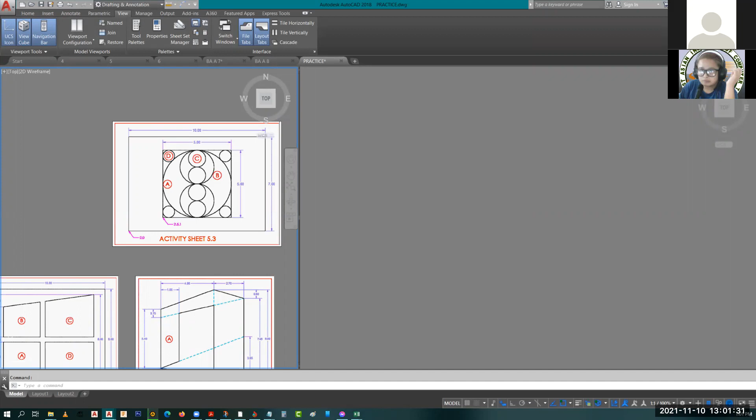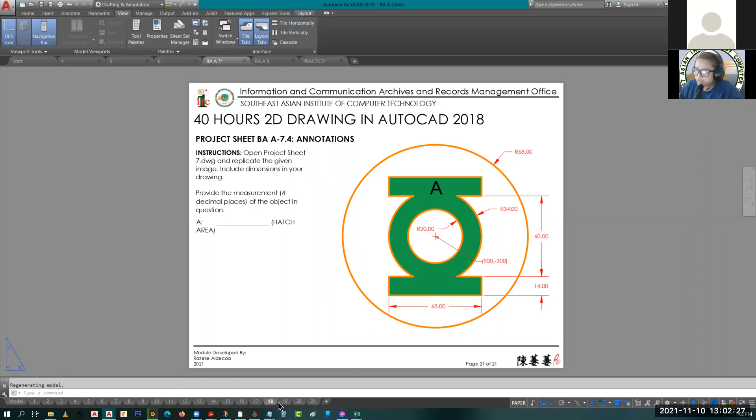Dun sa 7, ang binigay kong files isa-isa dun sa activity. Isang file, isang activity, isang job sheet. Pero yung sa project sheet, 4 yung gagawin ninyo, pero ilalagay nyo siya sa isang file lang. Open project sheet 7.dwg. Ibig sabihin, gagawin nyo siya sa isang file lang.

Hindi, 5 yan eh. Hindi ko pinalitan ng number. So 5 objects under sa project sheet 7.dwg.

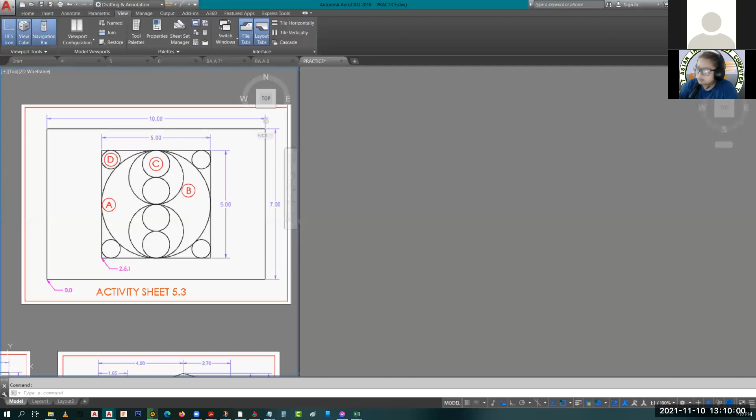Okay, review muna. For this one, this is the activity sheet 5.3, this is under the draw command. This is easy for yung mga rectangle part lang, but for the circles, hindi ko binigay yung radius or diameter, whatnot. However, apparent naman siya, kung i-analyze po natin ang object, pwede siyang makikita nyo, given naman siya. Pero kung ayaw nyo nang mag-compute or mag-analyze, you can. So here, I'm going to start na natin.

So yan o, ang isang napansin kong error, nalilimutan nyo yung mga border. Yan, ang ginagawa ito lang. Or dun sa other sheets na binigay ko, nalimutan ilagay yung border. And that's still important kasi nakalagay siya dyan, hindi yung red had, the black lines.

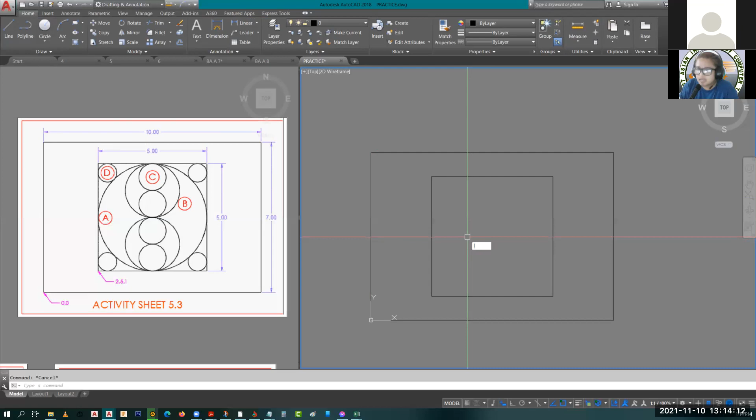So to this one, just use the line command. Then use the midpoint with the circle command - circle, then to specify the center point, get the midpoint of the inclined line. That's your center. Then once you click the center or the midpoint as your center, go to the midpoint at the top, or you can use this one, or that one, or this one. So without typing the value, you just have to select the midpoint, then click on the midpoint here.

So when you finish the command and select the circle you just created, you can see that the radius is 2.5, and that's correct because you're at the midpoint or middle part of the square, you just push it out to here. So the distance is 2.5. Then you'll also see in your quick properties that the diameter is 5. So that's correct.

So that's one strategy. I'll erase this.

Another one is tan-tan-tan. So to avoid making an inclined line, you can use this - you have to get this as your tangent, tangent there, tangent there, and also here. Let's click on our circle we just made, same thing - we ended up making the same circle. Not exactly the same, it's another circle, but with the same properties: radius is 2.5, diameter is 5. So that's it if you don't want to make an inclined line.

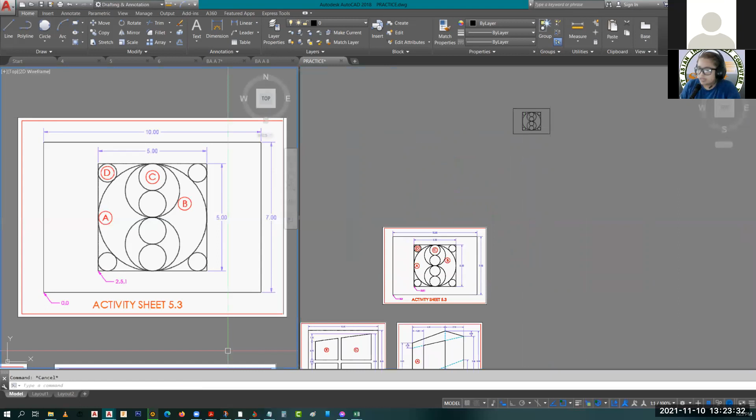Next, activity sheet 6.1. So, again here, ang laging nalilimutan is the border. Or medyo kulang yung border. Huwag niyong kalimutan kasi may dimension naman siya. Okay, so ibig sabihin, kasama siya dun sa object ninyo, or sa final output.

So next, again we're going to create the border, so rectangle ulit siya. So starting point is 0,0. Then the dimension of this square is 10, rectangle, 10 by 9. So yan, click here. Okay, so that's your border.

Now, for this part, the window part in this logo, you can use different strategies. Pero pwede mong hiwa-hiwalayin yung length, or pwede mong i-join together na lang. Well, again, depende sa'yo. So ang ipapakita ko, one of my strategies in creating this object.

So, okay, L, then the starting point is 1, 1.6. I think, tama ba? O 1. Tama, so L. 1, 1.6.

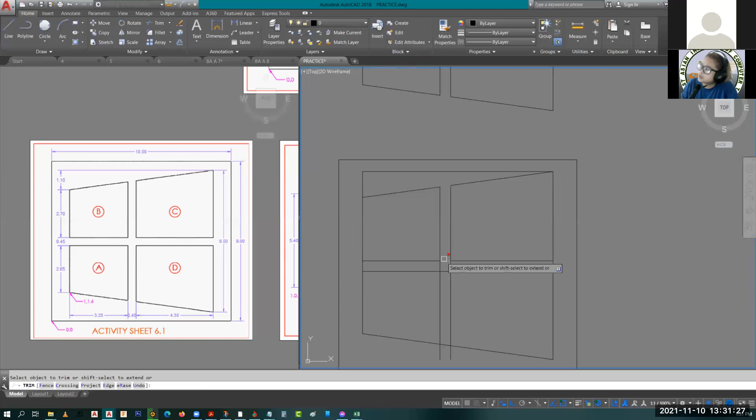Ito hindi mo na siya matitrim because this is a separate entity or a separate component. Wala naman siyang border or, sabi ko nga, boundary to trim. So dito lang tayo. This one you can trim also. So yan. For the other parts, you can select then delete. Yan. So ito pa.

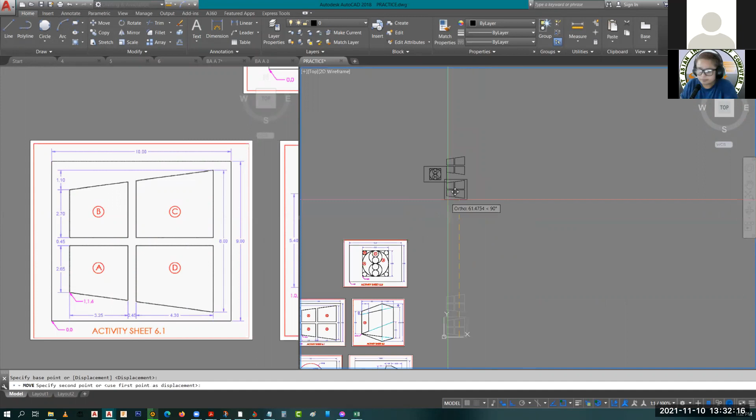So this one, this is much less time to do than dun sa unang strategy ko kanina. So again, depende sa inyo kung paano nyo siya i-strategize. So yan, that's for 6.1. Again, I'll move this somewhere up here para hindi makagambala. Kasi pare-pareho naman siya magsa-start dun sa origin. So, i-move ko lang.

Okay. So, this one, activity sheet 6.2. Again, ay, ito walang border. So, okay lang. Okay. Strategy.

Ay! Ito ba yung binigay ko? Sandali. Parang kulang ako dito. Ito ba yung nasa PDF nyo? Yes po. Wala yung dito? I think ang binigay ko meron eh. Sandali. Ibang folder kasi yung kinuhanan ko. Sandali. Ha? Wait.

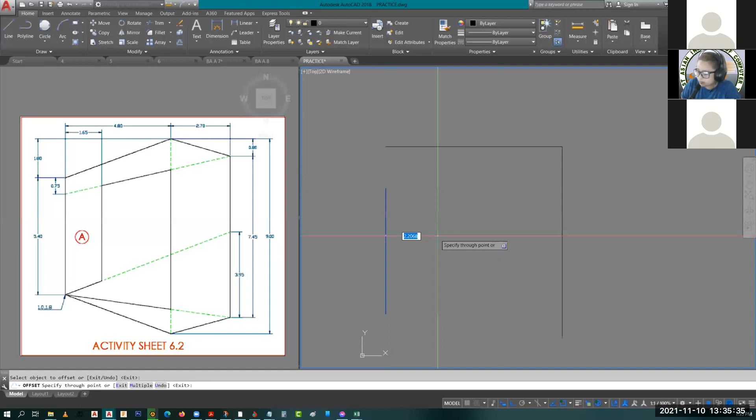Then, I'll offset this one, ito, at saka ito to their designated location. So, offset, I'm going to use through kasi magkaiba naman yung distance niya. Through. Select this. That's 1.65. This one, this is 2.7. So, this is okay.

Ang mangyayari na lang, ay actually, dapat hindi pala, no? Hindi ko na i-offset. I'll use line dito sa endpoint na to, tsaka pag na 9 na ako pababa. 9. So, para mas madaling mag-connect because we're going to connect this here. Tapos, another one at this point. Okay.

We can create this one na already. Yan na yan. Ang problema is this. So, here, pwede naman, from this point, create another line 3.95. Then, connect mo dun sa endpoint na yon. So, another one, this one. Pababa, 0.75. Connect mo dun sa, I think, dulo. Dito. Yan. So, mapapansin nyo, because I turned off the ortho, medyo naggaganyan siya.

So, sabi ko nga, depende sa paggamit. When you are creating inclined line, turn off na natin yung ortho. Yan. So, this one should be connected to this. So, dito yan. Ching. Then, let's connect this to this and here.

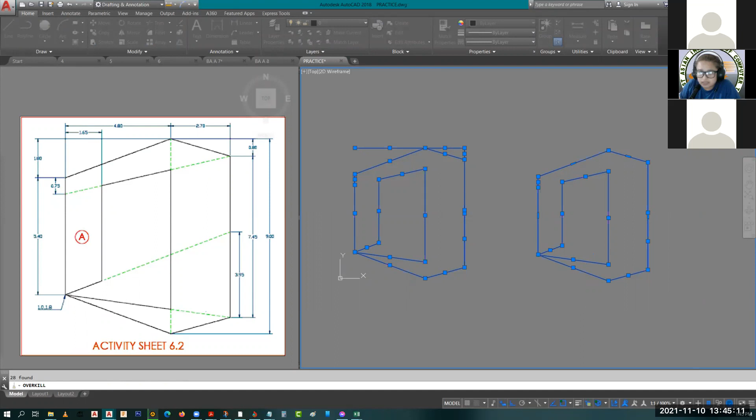Nasa na? Sandali, yung ating dialog box ay nasa kabila. Okay, so this one, ito dapat yung dialog box niya. So here, accept the default, then click OK. So sa ating command line, makikita nyo 9 overlapping objects or segments deleted.

So if you remember, dito sa part na to, kanina nung tig-click ko, there are 3 components existing. So now, ang natira na lang si polyline. So yan, hindi naman siya duplicate or hindi naman siya i-delete ni overkill kasi isang linya naman siya, wala naman siyang overlapping something.

So yan, okay, to get the area for this one, nagkakaroon ng confusion kasi actually you can, nasa na yung ating, you can perform hatch talaga. Kasi nakita niya, na-detect niya yung enclosed space. Pero, to get the area, hindi lalabas.

Sa ating quick properties or maski sa, nasa na yung tinype ko, LI, sa list, kasi, hindi siya lalabas dyan. It's because dun sa pag-hatch mo, may isang point doon na dinaanan twice. This point.

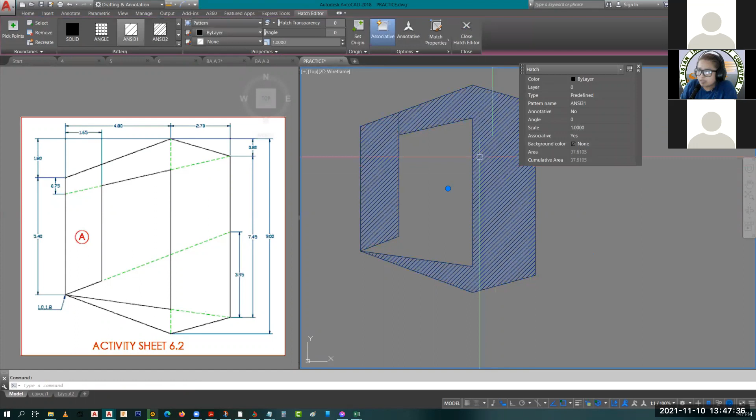Lalabas yung inyong value ng area. Kasi ang kinuha niya muna is this part, loop lang niya, kaysa sa isang isahan na nagkaroon ng problema dahil may isang point na twice na-detect, kaya hindi niya na-calculate yung area. Para ma-remedyo, pwede kang mag-trim dun sa hindi kasali sa object. I-trim mo na siya, hindi magbabago yung area mo.

I'll move this sa taas. Nakatatlo na tayo. 48 minutes, tatlo. Okay.

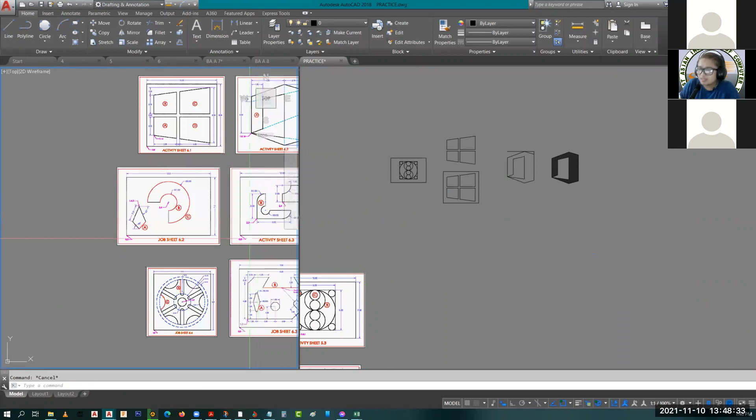Hindi ko na gagawin itong part na to kasi madali lang siya. You just enter the radius or diameter, then quadrant to quadrant sa line, quadrant to quadrant sa line, trim. Ang kailangan is this one, may angle dito sa ilalim, angle lang.

Dito, the technique is, sa AutoCAD walang problema na hindi ka magbigay ng eksakto kaagad. May command na magagamit ka, trim. So let's say I entered 1.5, 3. Actually this is incorrect, nalimutan kong ilagay dito yung 0.5. This is 1.5, 3.5, medyo mataas.

Kaya yung ibang gumawa medyo hababa. Well, that's fine kasi ako naman yung nag-check. Ang importante is this, not the location here. Ang pinapakuha ko itong length na to. So let's say this is 1.5, 3 or 3.5. I'll use the length and the angle. So that's at 2, angle negative 67 because it's clockwise, negative angle.

Now the problem is this one. Sabihin natin, screenshot natin para ma-discuss natin. Na-delete yung screenshot. New, okay.

If this is 48, similar lang siya, ito 48 din, kaya lang galing ka dito. So ang kailangan natin is this one. Paano siya ika-calculate? Going back sa trigonometry o basic algebra - alam ko trigonometry, sa trigo, similar angles or opposite angles, tama ba?

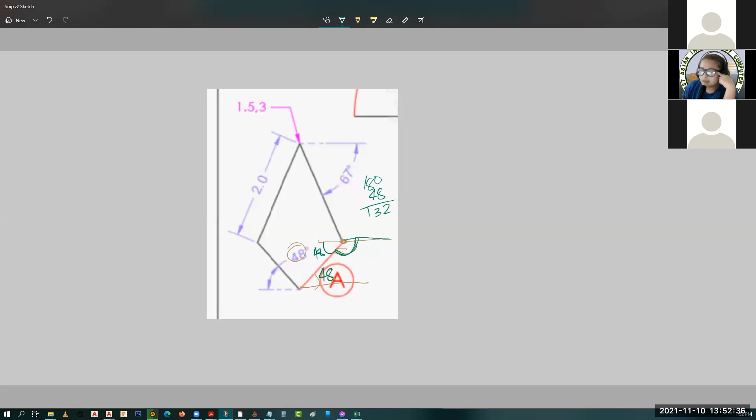Palitan natin, hindi ko nakikita yung stats. So this is 48. Sorry about that, may urgent lang pero tatapusin ko muna itong klase ko. So 48, opposite angles - if this is 48, ang opposite niya is 48. So makukompute mo kung ilan ito. That's 180 less 48 is 132. Pero dahil galing sa positive x-axis clockwise direction, this is negative 132. So na-solve yung angle, walang problema.

Anong gagamitin mong length? Sa AutoCAD okay lang na mag-assume ka medyo mahaba, or habaan mo, huwag naman yung exage. So this one, I'm going to use the length 2 uli. Yan, length, line. Ito, at 2, angle negative 132.

Paano naman yan mangyayari? Sabi ko you can use mirror, however yung error dito, ang ginagawa nilang mirror line is this one, which is not correct. Balik tayo dun sa ating screenshot. Kung mapapansin mo, this is mirrored along the Y, straight lang siya, vertical.

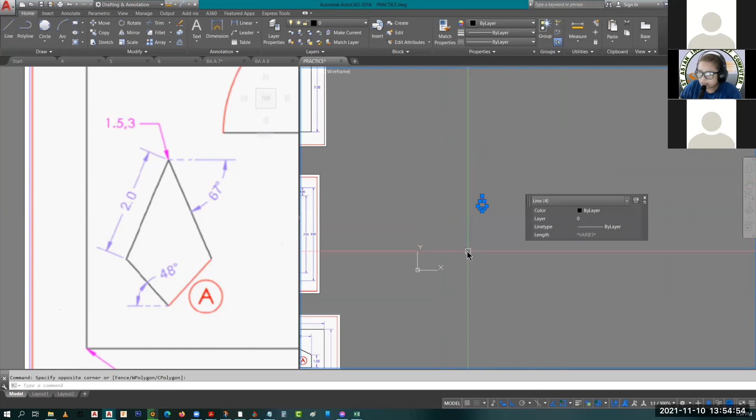Delete ko na lang, hindi ko na, kasi hindi ko naman ginawa lahat. Okay pa tayo, no?

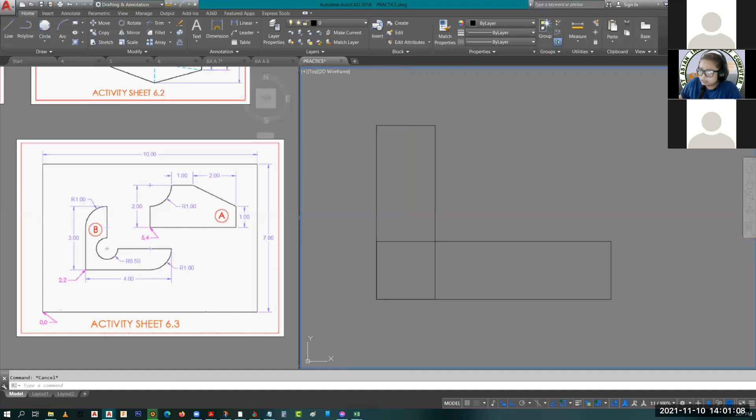The center for this circle, itong arc pala, hindi na siya circle kasi hindi na siya buo, is the intersection of this vertical and horizontal line. So ito na siya, circle ka diyan. INT, hindi naka-activate ang intersection. Then 0.5 ang radius.

Tapos for this one, you can use fillet, then the radius, enter the radius 1. So dito, may hindi ako ginawa. So fillet, radius 1, at gagamit ako ng multiple kasi dalawang beses ko siyang gagawin, para hindi ko na i-activate uli yung fillet command. So select multiple na ako, this one and this one, this one and this one.

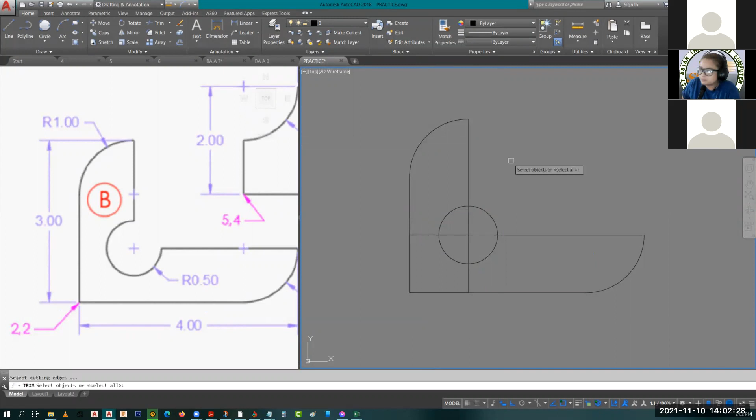So after filleting, after mo i-fillet itong curve na ito, you can use trim. So trim pa pala kasi polyline pala ito. So yan na, that's your first object dito sa atin.

Do not forget to save your file as you proceed, no? Kasi minsan sa sobrang ka-excitedan mong gumawa ng object, tapos madami ka nang nagawa, nag-crash, baka hindi mo siya ma-recover. At mas masakit yun sa damdamin, uulit ka doon.

Okay, for this one, you can use rectang uli. So as you analyze this, rectangular object naman yung original niya eh. Nagkaroon lang siya ng curve o ng arc dito na ang center niya is the intersection of the vertical and horizontal line, yung kanto, the end or the edge of that rectangle. This part, you can use chamfer.

So again, rectang ulit tayo. Tapos dimension, for the length we have 2, 1, and the radius 1. So 2 plus 1 plus 1, kasi galing nga siya dito eh, sa kanto. So ibig sabihin, yung length niya from this point to the center is 1. Oh tama, 4, 2. So 4 and 2.

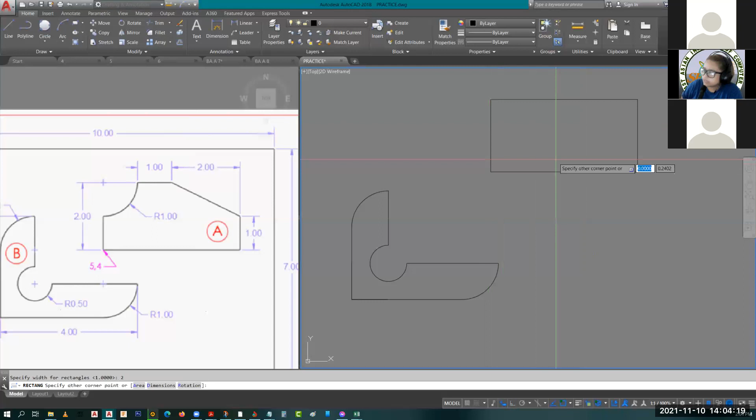Dito natin, next chamfer. So pag nag-chamfer ka, yung distance mo, laging isipin, yung distance na ilalagay niyo coming from that edge, yung edge ng i-chamfer ninyo. So distance, 2 and distance 1 because ito yung 2 natin, tapos yung 1 dito. So 2 and 1. So for the first line, dapat ito din yung first line ninyo, hindi ito. Okay, kasi ito yung distance 1 natin. Distance 1, distance 2, yan.

Next is this curve. Do not use fillet, kasi ang magagawa niya, hindi ganito kundi pag ganun. So dapat nandito yung center. Yan, then radius 1, then perform trim.

So that's your object, so pag nag-hatch ka, another one. So this one, 6.2146, this one, 4.9817. May nagsabi, you can use arc.

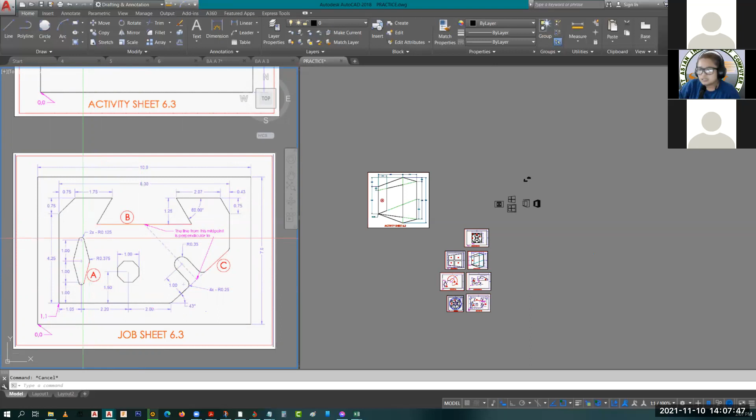Ang ginawa ko kasi, o isa sa mga strategies ko in creating this object is, I always create, parang ang base object ko is a rectangle, kasi mas madali na lang siyang i-manipulate. Pwede rin naman puro line, pero ang form mo is rectangle. Kasi as you analyze, ito pwede mong i-chamfer, this one also chamfer. So kung iisa-isahin mo pa yan, makalculate ka pa. Add, ganyan.

Sandali, may message.

May nag-ask paano makikita yung area pag sinelect. May I ask, naka-on naman yung quick properties mo?

Punta ka muna, nasa na? Ito, QP mode. Dapat naka-1 yan, meaning lalabas itong pag nag-select ka ng hatch sa quick properties. Kung hindi yan naka 1, type 0 or 1. Kung wala din siya dito sa status bar, go to customization, tapos lalabas yung mga different tools. Dapat activate at naka-check yung quick properties, then lalabas yan dito.

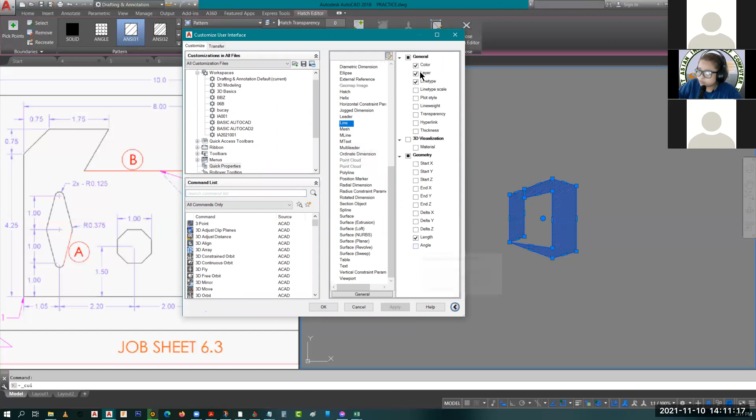So that's for hatch. You can also modify yung sa line, kung ano ang gusto mong makita sa quick properties. But again, ang concern natin is yung area sa hatch. So yan, okay na? Sana makita mo na yung area.

Okay, going back. Nasaan na ba ako? Okay na daw. So again, dito po sa ating job sheet 6.3, pwede tayong mag-rectangle.

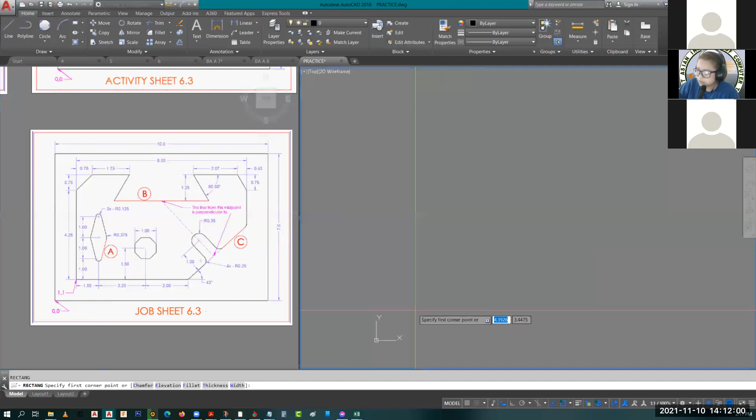So here, nasa na ang aking origin. Dito, this is 8 by 5. Ay, hindi, hindi ako nag-D. Dito, D, 8 by 5. Yan.

So dahil meron ka ng rectangle, you can perform the chamfer for these edges or corners. Unahin natin dito, for this one walang problema, kasi 0.75, 0.75, kahit anong unahin mo. CHA, then distance 0.75, 0.75, click here and here. So hama na, next, ito.

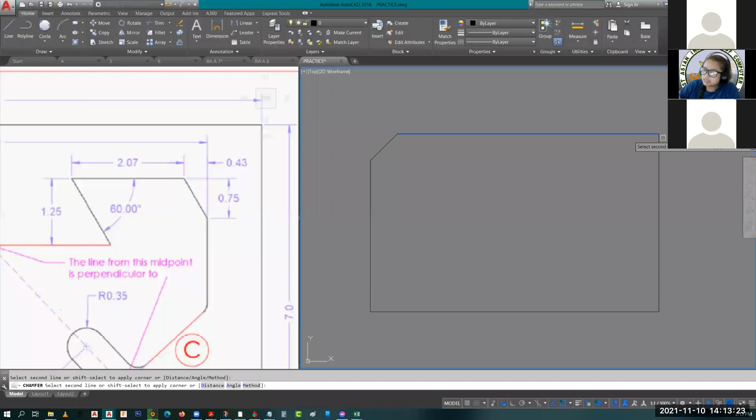You have 0.43 ito, tapos 0.75 dito. So chamfer again, distance 0.43, that's your line 1, and 0.75 your line 2. So first line, second line. Diyan ka, okay, next chamfer is this one.

So sabi ko nga, pag nag-chamfer tayo, ang distance na tinutukoy niya will come from the edge. Okay, so from this point or this corner papunta dito, ilan? Kasi yun yung gagamitin nating distance. We have the angle naman 43.

So let's try. We have the total length of 8. 8, tapos 2, 4, 5, 5.25, 2.75. Okay, so chamfer, ang pwede natin magamit is the angle.

Specify chamfer length, that's 2.75, diba? 2, 4, 6, 7, 8. Then the angle is 43. This is our line, then the angle.

Let's see kung tama yung ating ginawa. So you can use the measure, angle, this one and this one. 137 plus 43. Okay, so try natin ulit. Ito muna. Ay, oo, ito ma-measure niya eh. I'll use this one na lang. Here, I think this is tama. 43, tama na. So yan.

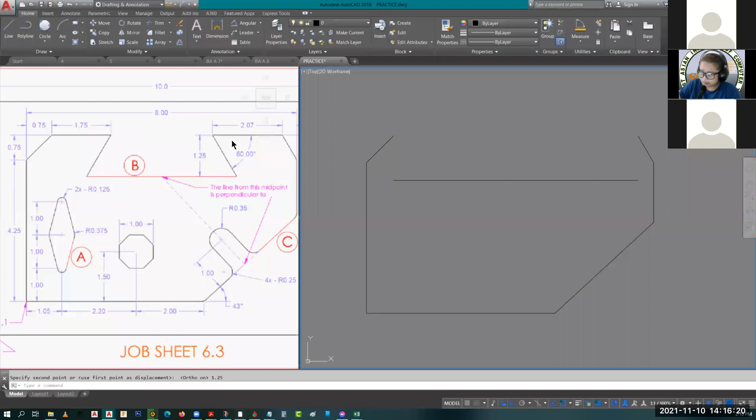Next, we're going to add the distance. Mas madali, ito, galing dito, kasi may angle na tayo dyan. Dito rin pwede, pero may gagawin ako. So this one, line, this to this, the distance is 2.07.

Tapos using the 60 as the angle, I'll use polar coordinate entry, pero hindi ko gagamitin 1.25. Of course, the line I'll create is an inclined one, kaya or hypotenuse, dapat mas mahaba sa 1.25. Pwedeng 1.5 or pwedeng 2, wag naman 10 kasi mas lampas na siya doon. So pag nag-agi siya,

mahihirapan ka mag-trim. So this one, I'll turn the ortho off para, ayan. So I'll use at 1.5, angle negative 60. So again, coming from the positive x-axis, clockwise rotation, negative angle siya. So ayan, almost okay, almost there.

Now, hindi ko na siya ulitin dito, hindi ko muna siya i-modify. I'll create this line, 1.75. So ortho again, para hindi na ako relative. So 1.75, yan na. Okay, next, I'll use mirror for this one.

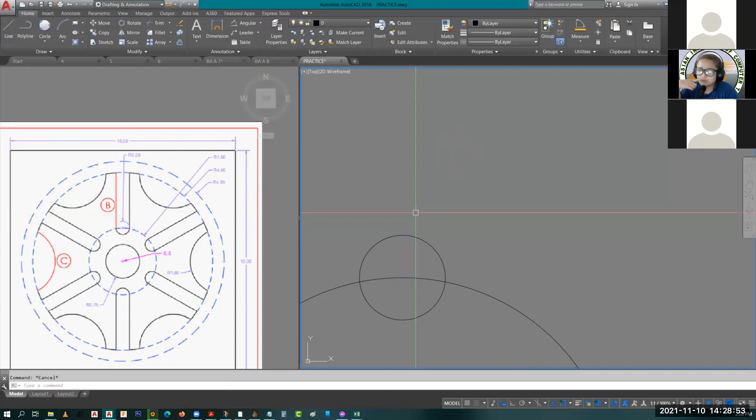Kung gagawa ka ng straight line galing sa center or hali sa circle, ang gagamitin mong mode or snap mode is the quadrant. Pero pag inclined, kailangan ka mag-tangent. Actually pwede ka naman mag-tangent dito, kaya lang para mas madali, mag-quadrant ka na lang.

So dito makikita mo, straight lang naman siya. Huwag ka ditong gumawa kasi medyo angular siya. Ito, walang problema. So, line.

Naghihirap siyang mag-solo. Okay, ang kukunin mo talaga. Pwede kasi, or ang isang error, kahalusan na error, dito is dito nila kinukuha yung point. Ito, dyan, nag-INT sila dyan. Tapos gagawa straight up.

Let's compare it kung sa quadrant ito. So, L... flat, parang may gumagalaw. Wala naman.

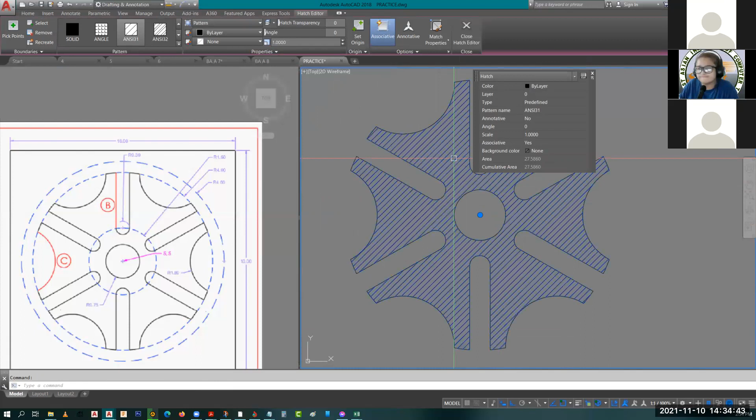Tapos, di ba, hanapin itong line na to, yung distance. You can't get the distance na solo because naka-array na siya. You can type X to explode para makuha mo yung individual line niya.

So 2.4887. Also the arc length for this, explode mo din yan, this one. Arc length 3.2054. So yan.

Questions? Okay pa ba?

I think siguro, sige Michelle, dun sa pag-chamfer mo, nag-set ka ba ng distance? Hindi ko nakikita yung ano. Si whole process, second point, hindi, chamfer, first point, chamfer, enter, D for distance, tapos set mo yung distance 1 and distance 2. Automatic, pagka set mo ng distance 2, pipili ka na ng line 1, sunod line 2. Enter.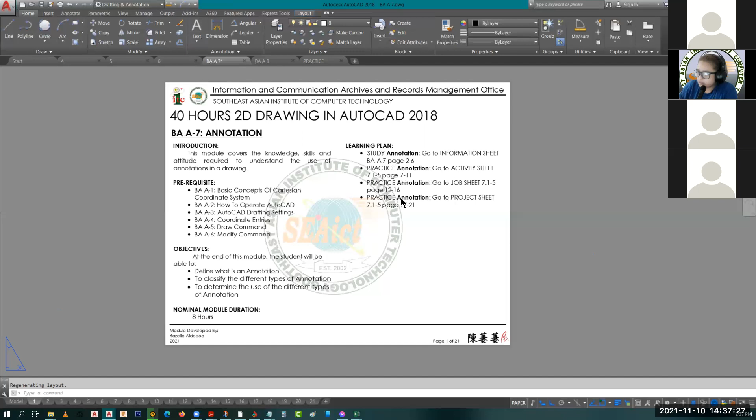Ayan, again, text, ang annotation, sige. Page 2. So ayan na, annotation objects include dimension, notes, and other types of explanatory symbols or objects commonly used to add information to your drawing. Tapos, this provide information about the features such as the length of the wall, diameter. Basahin nyo na lang, so yan.

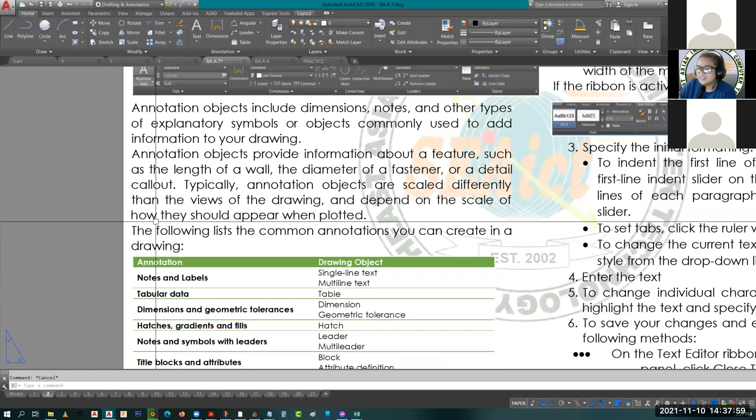So here, different types of annotations. So we have notes and labels, so that's under the Annotate tab. Pwede naman din dito sa Annotation group, pero mas detailed sa Annotate tab. So this one, we have the multi-line text or single text lines, yan.

Tables, actually naka-modified na to. Dimension, geometric tolerances, hatches, so si hatch, kabali pa rin yan sa annotation. So indicate mo pa kung ano yung hinahatch mo. Notes and symbols na may leaders, title blocks and attributes. So yan po.

So this one, hahayaan ko kayong i-explore ito, pero parang gist lang here. For text, we have multi-line at saka single text. When we say, or ang sample ng ating multi-line, i-create lang ako ng ganyan, click and click.

Dali, hindi pa lumalabas. So, I'll encode 'Hello World programming.' Then when I enter, 'Hello Philippines.'

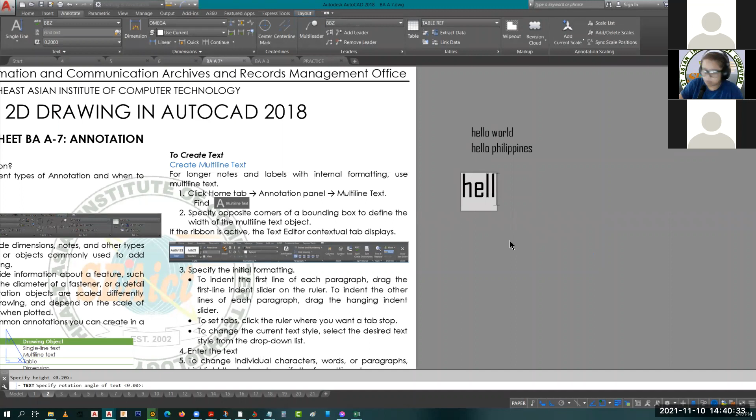Kung magsi-single line text ka: 'Hello world.' Enter. 'Hello Philippines.'

Pag sinelect mo, this one is text lang, hindi siya separate entity. So, separate entity, si Hello World, tsaka si Hello Philippines. Yan lang naman, sorry.

Parang nasa 8 yata yung styles. But this one, kung paano lang gamitin yung mga annotate or annotation commands. So yan, that's for text.

Most of the time, mas magandang multi-line text na lang siya. Again, depende sa user. So we're going to erase that. Erase. So that's for text.

Yan na. Next are the dimensions. So sa dimension, yan na yung measurement.

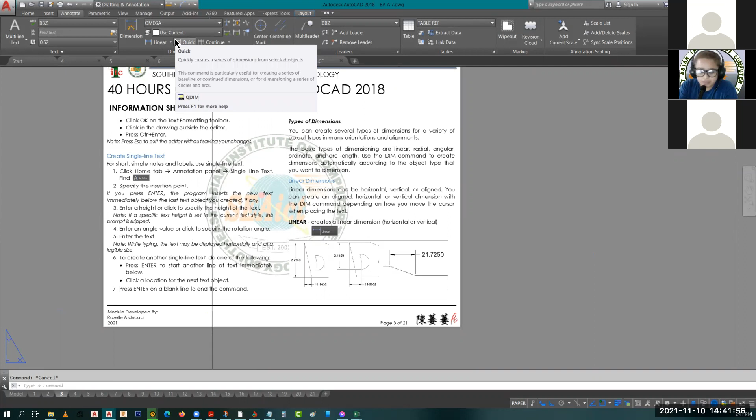Measurement ng ating dinadrawing. Dito na kay 7, simula 7, papunta kay 8, lahat na ng idodrawing niyo, lalagyan niyo na ng dimension.

Measurement. So here, under the dimension group, we have different types of annotation or sa dimension: linear, aligned, angular, arc length, radius, diameter, jog, ordinate.

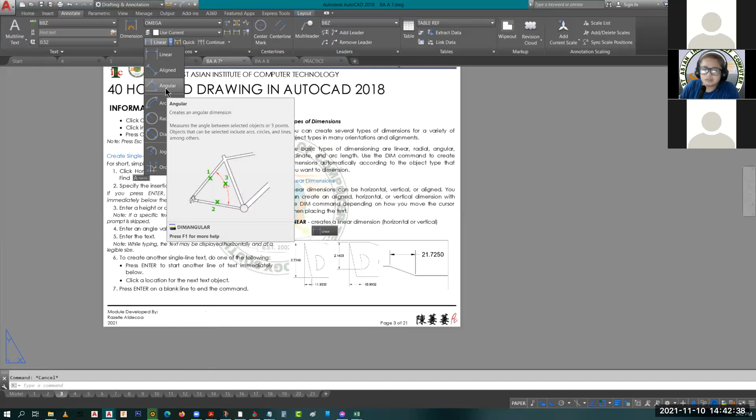For the linear, or eto kasing iba, understood naman angular, i-measure mo yung angle. The arc length, syempre, i-measure mo yung length ng arc. The radius, diameter, di ba?

Very easy. However, dito, linear and aligned, medyo depende.

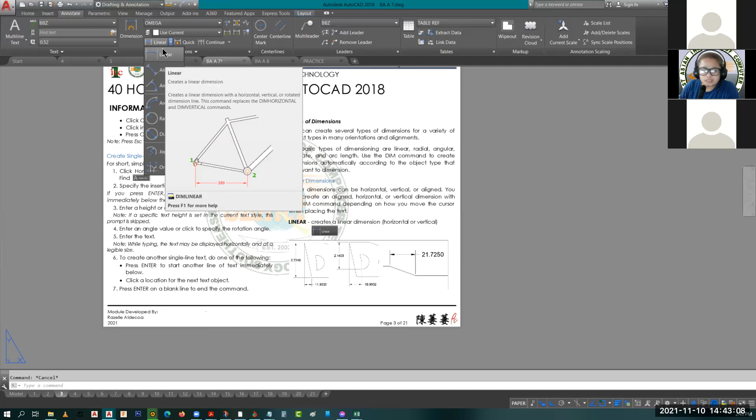So when you say linear, it will measure either horizontal or vertical measurement of your line, regardless if it's a straight line, when straight, 90-degree straight, or an inclined line.

Ang i-measure niya si horizontal and vertical distance mo. But for aligned, it will measure your total length, lalo na kung inclined siya, yung hypotenuse.

Yan, ito yung kanyang sample, si horizontal distance. Or, aligned. Wrong ito, wrong ang in-screenshot ni Lola.

So sige, nasa na yun? Ito. Papasample lang ko lang ano. So, for the aligned...

Sige, you have two ways of selecting, ha. First is when you select the linear button...

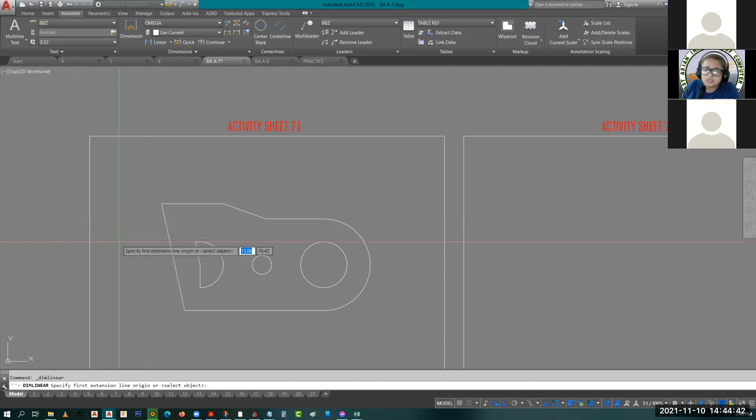It will ask you to specify the extension line origin or yung endpoint ng sisimulan mong i-measure. So, let's say this one. Ito, hanggang saan? Next is this one.

Tanggalin ko itong ortho. So this will measure the vertical or horizontal distance from this point to that point.

Okay, that's how you click and click. The other option is after you click linear, you press spacebar or enter. So isi-select mo na yung component, for this one, this is line.

So select mo, makikita mo naman mag-highlight yung line. Ayun na, nandiyan na si 56. Ibig sabihin, kung ito lang naman ang i-measure mo...

Mag-spacebar ka na, select component. Hindi ka pwedeng mag-spacebar kung ang i-measure mo is from this endpoint to this center. Kasi anong isi-select mo, 'di ba?

Wala. So ang gagamitan mo niyan, endpoint to center. Yan. Okay? So, that's for the linear. We also have the aligned.

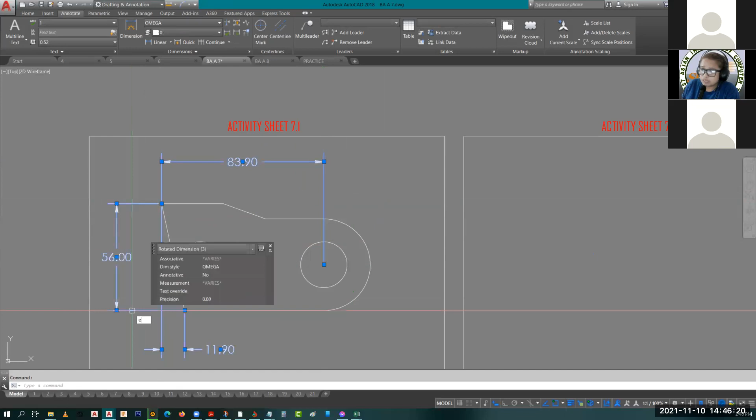Okay, precision is 2 decimal places. So kung aligned, kung hindi naman siya inclined, pwede mo rin gamitin si aligned, spacebar, select.

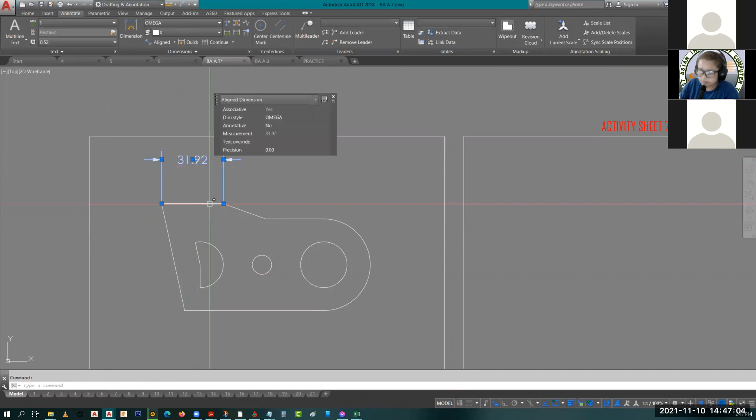That's 31.92. So ang i-measure niya lang is your distance. Okay? Next, angular. Siyempre, it will measure the angle of two lines you selected.

So, let's say this one and this one. So this is 102. Tama ba? Tama. Okay lang.

How about this one? Carry lang, okay. So isi-select mo lang yung dalawang lines na gusto mong kunan ng angle. Arc length. Okay, siyempre, si length ng arc mo. So ito, yan, 40, pwede rin sa value. So, 35.19.

Next, radius. Si radius at saka si diameter. Ano ba ang pagkakaiba nila?

Ang diameter ay dalawang radius, diba? 2 times the radius. So yan, also this one, ito, pwede mo rin siyang gamitan ng linear. Ang gagamitin mo lang is the endpoint to endpoint here.

Nasaan na? ENV. Yan. Pero, how would you indicate na circle ini? So pwede mo double-click on the dimension.

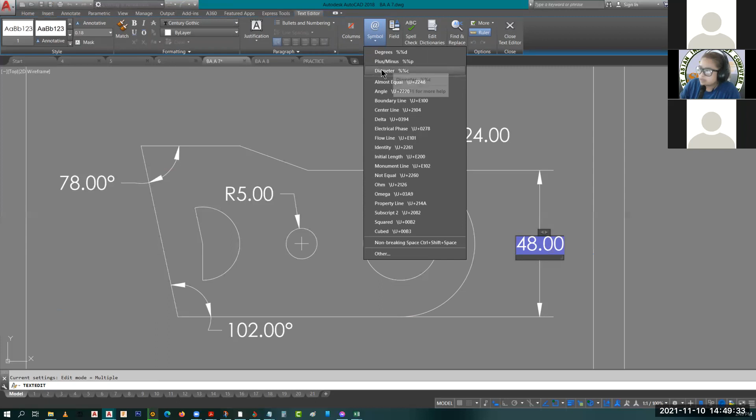So let's have the diameter here. Ibig sabihin, once na insert mo na, pwede ka nang mag-escape. So here, the diameter of this circle is 48.

So pwede mo naman din tanggalin si diameter kung length lang ang gusto mong ibigay. Pero is a circular. Yan.

Radius or diameter. For the jog, hindi ko ito masyadong ginagamit eh. Wait lang, may re-replyan lang ako.

Okay, so for the jog, ano ba ang ginagawa nitong jog? Specify center location override. Yan.

Wait, may kukuha kasing certificate. Madali lang.

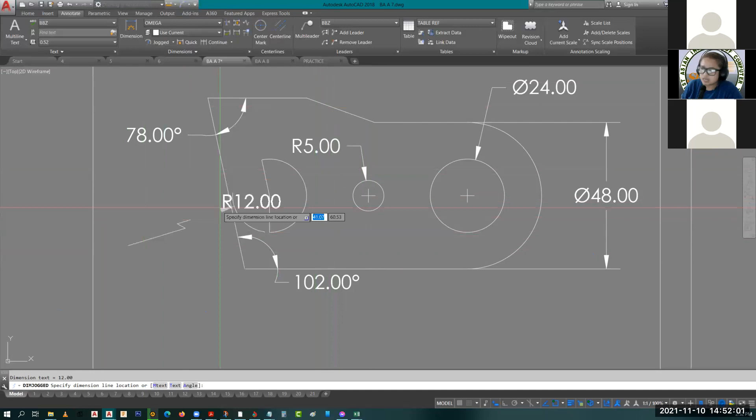Sabi, ulit, jog. Okay lang po, so yan. Saan mo siya ilalagay? So sabi dito, specify center location override, dito natin ilagay. So depende, again sabi ko nga hindi ko ito ginagamit. Yan, diyan mo siya ilalagay. Or pwede rin, kung ano ang radius kani, saan natin ilalagay? Dito, ilalayo mo lang siya. Kasi kahalusan, pag radius, pwede mo siyang ilayo. Yan.

Okay, next is ordinate. Sa ordinate, isa lang siya eh, either the x value or the x distance from the origin, or the y distance from the origin. So let's try this ordinate. So ito po, kung ito ang i-ordinate natin, this is 49.07 along x, thus this is 40.5 along y. I-check natin kung tama ang understanding.

ID, let's have this one. O, tama. So yung 49.07, that's your x value rather. So the 40.5 is your y value.

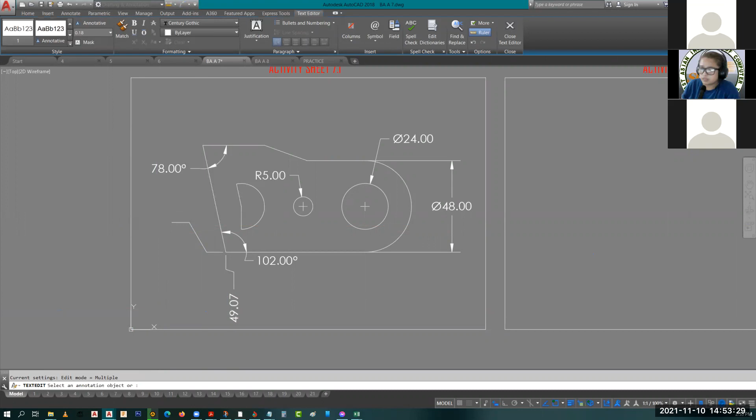So pwede mo naman din i-modify ito. Sabihin natin, pagsamahin natin si 49.07 at saka si 40.50. So ilalagay mo lang siya sa unahan. So, 49.07, comma, 40.50, so that's your point dito. Okay? So again, hindi yan yung ginagamit ko pag nagda-dimension. I use multi-leader sometimes. So yan.

Yan yung mga gagamitin muna natin. I will not dwell with this one, you can always try to discover this for yourself. Kasi kung i-discuss natin to lahat, yung information ma-override na, information overload na kayo. So at least this one, ito yung kailangan lang, linear hanggang diameter. The arc length, not so much, because what you need or what you really need is the radius diameter, not the arc length, to replicate the object.

Yan, just for measurement, pwede, para makita natin na tama, to verify what you're creating is correct. Pero to replicate, you need the radius diameter, not the arc length.

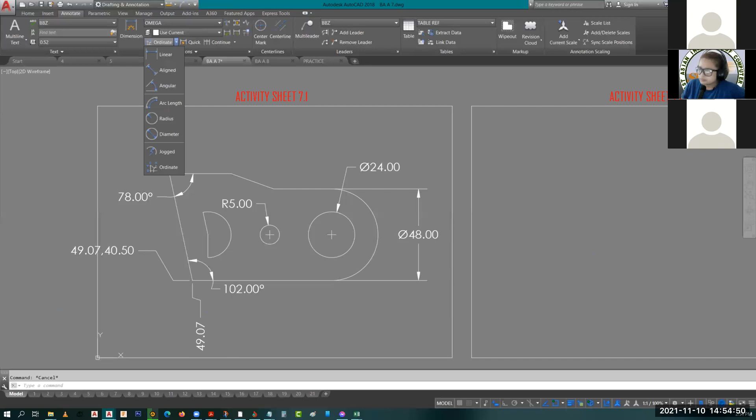Okay, what else? This one, the center lines, to indicate there is a circle or an arc, you create or you insert center mark. So for example, yan, para mas madali din ma-pinpoint kung saan yung center, we use center mark.

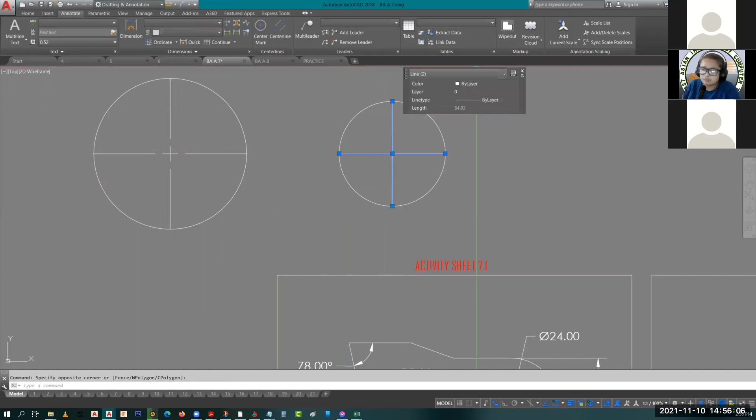Ano lang, wala ito sa 2016 pababa, hindi pa available yung center mark. So this one, I think 2017 may version na meron na. So 2017 pataas, available na si center mark. So kung you're using a lower version, ang ginagawa kahalusan dyan is you just create a line, quadrant to quadrant, tapos itong line na to babaguhin na lang ng components o ng line type para ma-identify as the center mark.

So yan, center line also, actually hindi ko naman yan ipapadwell sa inyo. Multi-leader, sa multi-leader, pwede naman kasing hindi ka na... nasa na yung multi-leader? May, ano tawag dito, may settings kasi to, and I think I'll discuss this sa intermediate, sa module 2, kasi ginagamit siya doon. Mas madali ito. Yan.

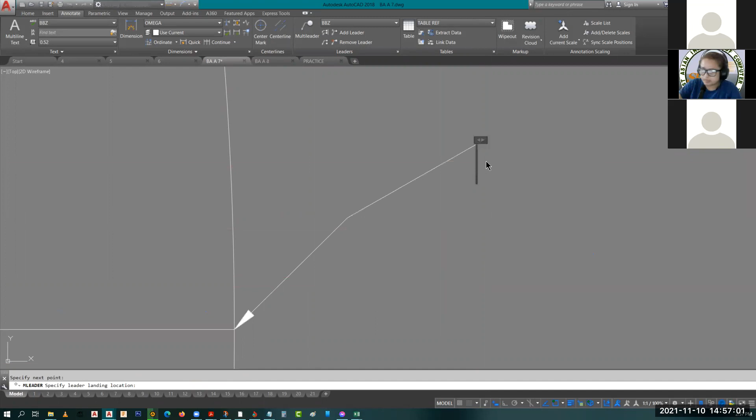Yan, sabihin natin, appraisal. So again, may setting din ito. This is also a form of annotation. Tables, still, yung revision cloud, I think yes, ano din siya, annotation din siya.

So yan, now for the exercise, ito, before you proceed with this one, tatanggalin ko ha. Try to add dimensions here. Ang rule dito, medyo ako meron yata ako ngayon na may nalimutan na ilagay or depende. Kasi kahit matagal na rin akong gumagamit ng AutoCAD, minsan ang pag-dimension very tedious. Madami kang makakalimutan. Mas magandang mag-drawing kaysa maglagay dimension, tama ba? Yung mga nagka-CAD dyan.

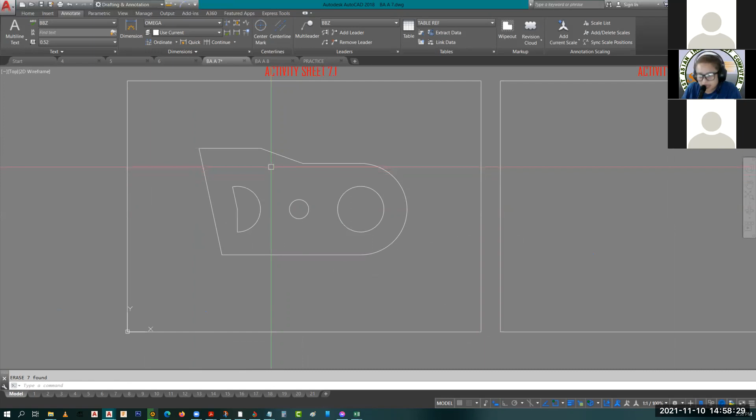So mas magandang mag-replicate kaysa magpa-replicate. So again, the rule here is you add dimensions accordingly, or hindi naman sandali, nalimutan ko yung word. Hindi mo, ito yung point na gusto kong iparating. Pwede ka, wag mong masyadong tipirin, wag ka naman masyadong exage mag-dimension.

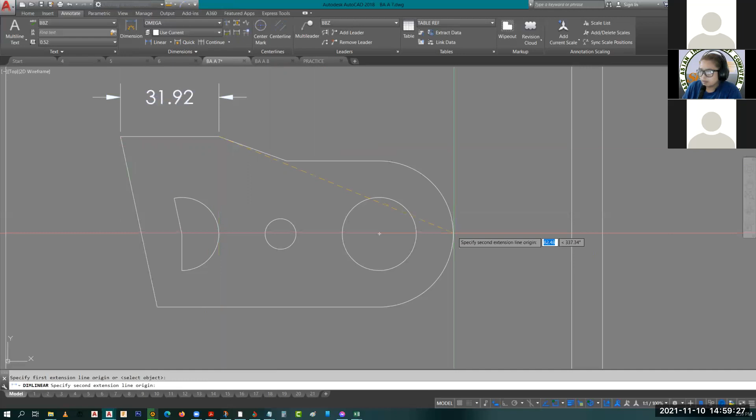Okay, when we say, or when I say tipirin, sige maglalagay ako dito ng dimension. Yan. O, nilagyan ko na, matipid. Matipid masyado, paano nyo i-replicate sa value?

Diba? Like this one, no? What you need to do is add or insert annotation or dimension. Then after inserting, i-replicate nyo. Okay, so yan, huwag masyadong matipid. Huwag din naman masyadong magarbo dimension. Meaning, tanggalin ko to.

Sample lang, medyo pangit. Ayun, do not over dimension. Okay, sample lang yan, itong part na to. So I have here 31.92, 21.98, 107.90 sa baba. So wala naman din problema, this is correct diba? Pag in-add mo yan, ito ang lalabas.

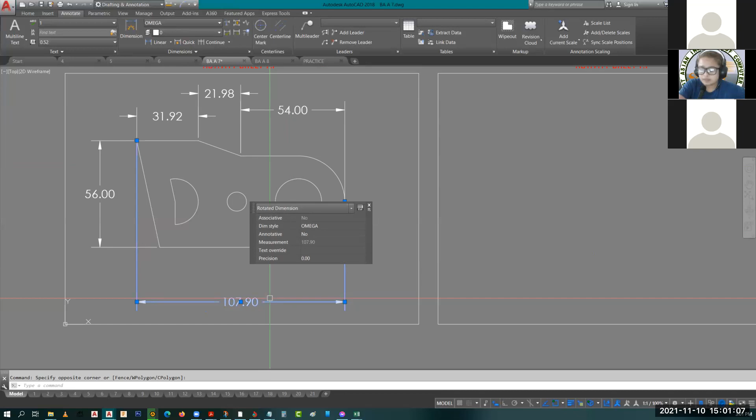Pero syempre, another ano na yan eh, parang dagdag pa rin yan sa file size. So either ito ang i-indicate mo, tanggalin mo to. Okay, ito na lang.

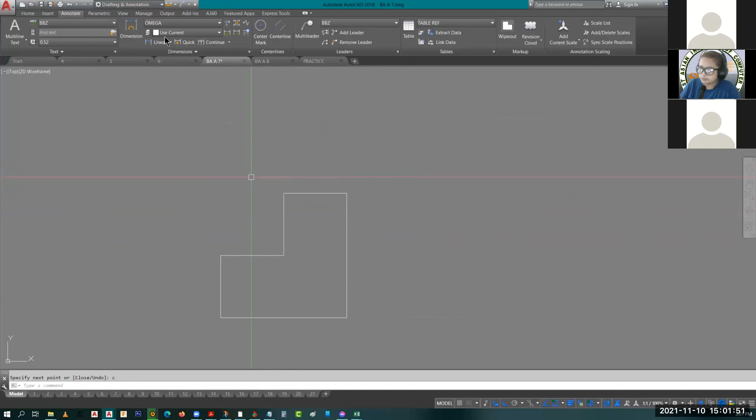Magugod lang pala. Line, 5. Width, 5, 10. 5. 10. Another 5. Close. Okay, ay, masyadong malaki ito.

Yeah, para swak naman. So here, ang gusto kong i-impart... okay, ano tayo, sound of silence, this one. I have here a simple object na dinimensionan. Over dimension because you have here 50 and 50, tapos may 100 ka pa dyan. Pwede mo man itong ma-replicate na hindi taas. Wag naman din ganito.

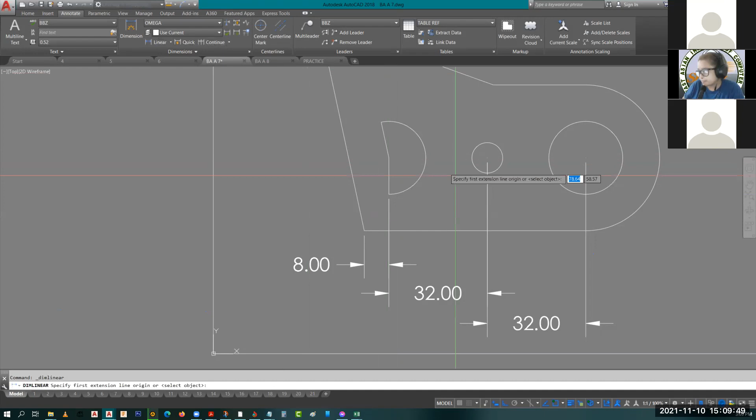Huwag niyo munang i-modify yung size. I just want you to practice how to add dimensions. So okay, ito ay aligned. So yan, ibig sabihin, nag-pass through siya dun sa center. Pwede naman, ito.

So I'll use diameter here. I'll use the radius here. Masyadong malaki kasi yung, yan. Then I'll use the angular dito.

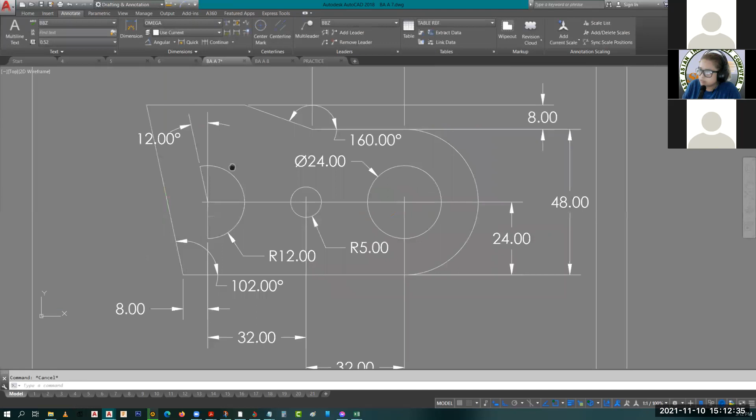Modify, tapos use the fit, bawasan nyo lang to 20 degrees. Ay 20 ang fit, liliit siya. Okay, mas okay na yan kaysa dun sa kanina, masyadong malaki. So balikan nyo na lang itong video na to.

So this one, you can or I can replicate this with this given dimension. Paano? So wala akong binigay na specific point, so you can click anywhere or you can start anywhere in your drawing area. So first line muna tayo. Ano yung strategy? Pwede ako mag-start dito sa point na to, papunta dito, paikot. Okay? So this one, line, click, tapos I need the length from this point papunta dito.

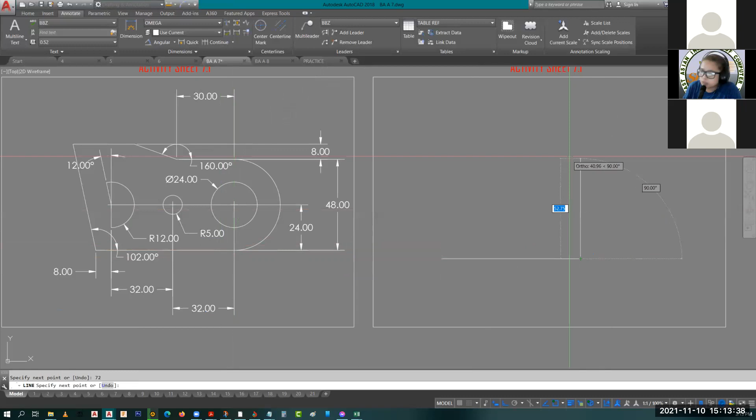So that's 32 times 2, 64. 64 plus 8, 72, di ba? 72. Okay, sa 72, aangat ako ng 24 para makuha ko yung center dito. So 24, escape, circle. So first circle I'm going to create is with the diameter 24. Another circle, this one hanggang dito. So hindi man siya indicated, pero nandoon yung center niya eh, click mo na lang yan dyan.

Next is from this quadrant papunta dito sa point na to, that's 30. So, 30.

Paano ko gagawin ito? Ang alam ko lang, vertical distance 8, angle 160. Hindi ko pwedeng gamitin si 8. So ano ang best process para sa akin?

Hindi na ako magka-calculate, so I'll create a line. Tapos angle ko is... ay mali, hindi, line.

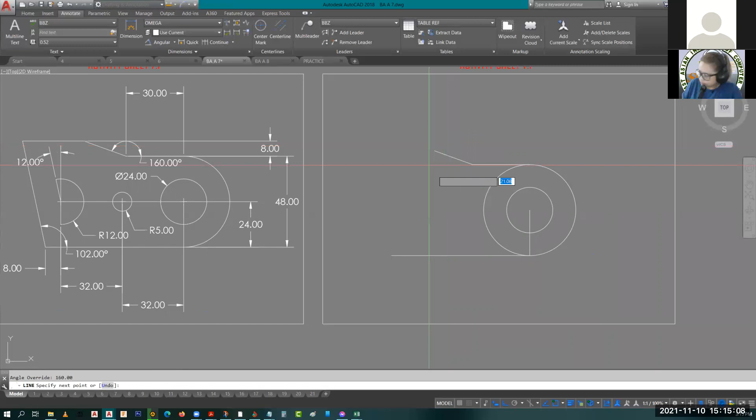Hindi ako maglalagay ng distance, I'll just use the angle. So angle sign, 160 degrees. Ito, pwede na ako mag-click anywhere.

Papasobrahan ko na lang siya because we have the modify commands naman. So dyan na.

Here, I'm going to offset this by 8. Dyan, then extend.

So here, move ko this endpoint to this point. Yan, wala muna akong gagalawin dyan.

Babalikan ko dito, so line. Similar with the process I made here, itong 160, I'm going to use that again.

I'm going to use angle 102. Pasobrahan ko na siya, so the intersection I'll trim.

Delete the excess, okay na yan. This one too, I'll delete this one. Next,

align dito yung circle with radius 5. I'll create a line as reference. So that's 32, then another 32.

Okay, first circle has a radius of 5. Then the other one, the center has a radius 12.

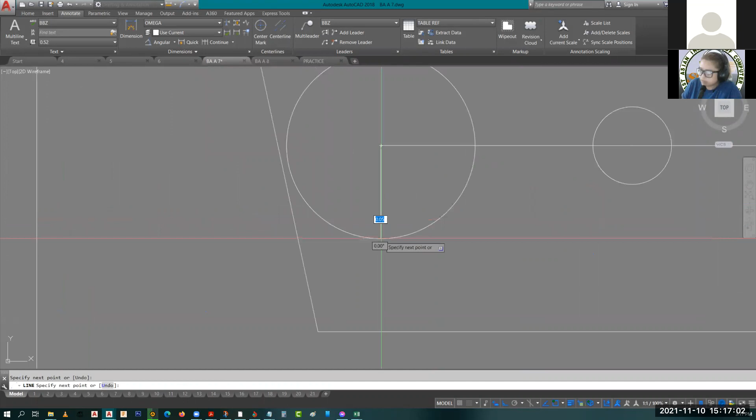Problema natin is this one, the 12. Ang 12 hali sa 90 degree angle, so idagdag mo na lang siya: 90 plus 12, it's 102. Galing ka dito,

angle 102, pasobrahan mo na naman again, trim. So delete or select the unnecessary lines.

Then trim excess. So that's how you check kung tama yung paglagay mo ng dimension.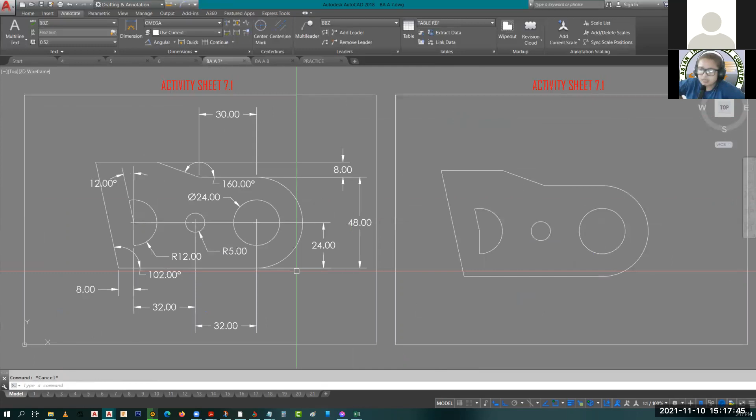Hindi mo kailangan ito kasi this is not an exact value. So dun tayo sa mas madaling makuha o hindi na kayo magka-calculate. So, this one,

i-try nyo po dun sa activity sheet 7.2. For you, try nyo muna ito 7.1. I-replicate nyo lang yung ginawa ko.

I hope when you replicate what I do, na-internalize nyo muna siya, o ini-internalize nyo why I did that, at ano yung naitutulong niya sa pag-recreate nyo ng object. So dito, wala kang makikitang, anong tawag dito?

May decimal place, so that's one way of me checking na tama talaga, makikita mga values niyan. Kahit dagdagan mo ng precision, sakto yan. So yun yung ginamit ko para mas mapadali yung pag-replicate nito.

We can use the 57.25 pero hindi tayo sure kung, ay ginamit na natin to kanina eh, kung exact siya. So ito, pag tinaasan kong precision, ibig sabihin hindi tayo magiging precise kahit gamitin natin yung 8

decimal place niya. So yan. Yan.

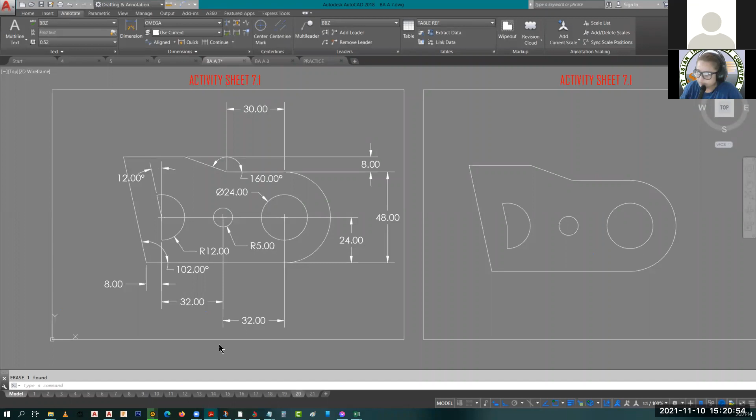Huwag muna tayong mag-picture-picture, feeling ko stress na stress kayo sa pinapagawa ko. Okay, so ganito, 7, no? Sa 7, medyo madami siya. So it's the start ng pag-review nyo

for post-assessment, may mga similar dyan na items. So do not get overexcited when creating objects. Ang pinaka-suggestion ko dito, you analyze first

bago kayo mag-command. Kasi pag na-excite kayo, nag-command kayo kaagad, mahihirapan kayo o medyo matatagalan kayong mag-strategize. Diba? Strategy muna, tapos saka na lang yung editing. So I hope yan.

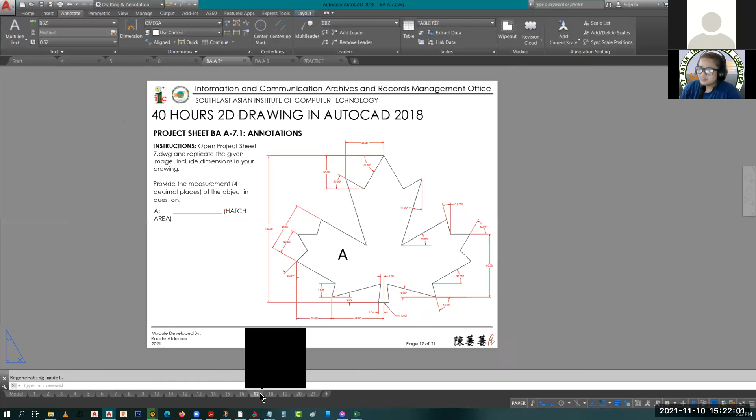Hi from Kerokeropi. Hey. Oh, sinong pupuntang Canada? Picture, picture. So yan. Kimono.

Omega. So yan. Kay Green Lantern. So I hope once na nag-touch na kayo ng 7, i-enjoy nyo muna.

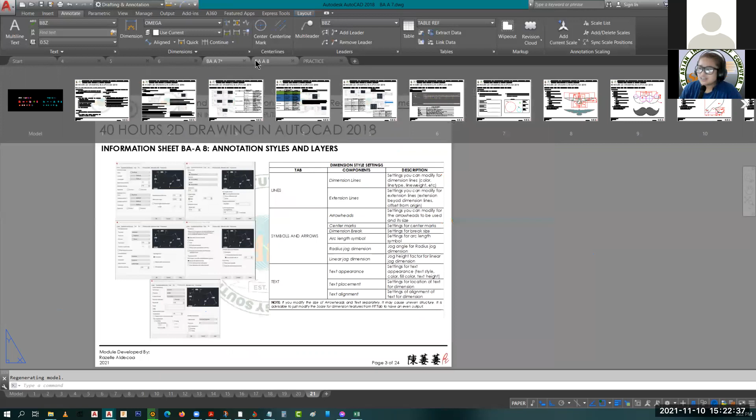Sa 8, medyo ang level of difficulty medyo tumaas na. So si 7, madali-dali pa siya compared sa 8. Yan.

Yan, papahiling lang natin, so medyo madami. Sabi ko nga, madami ako magbigay for you to practice, kasi kung isang object lang ang ibibigay ko sa inyo, yun lang yung mapaprocess ninyo o yun lang yung

ma-memorize or something. So yan po. Okay, wala nang question, promise. If you don't have any questions na,